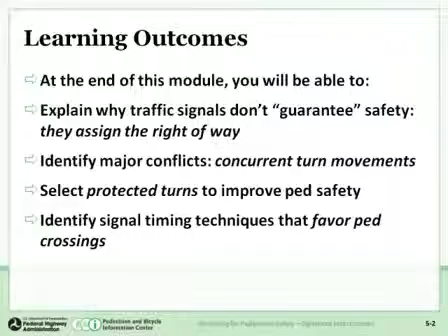We'll talk about the major conflicts for pedestrians, which are mainly concurrent turning movements with vehicles. We will talk about protected turns versus permissive turns and how protected turns improve pedestrian safety. And we'll go through a number of signal timing techniques and signal display techniques that can favor pedestrian crossings and sometimes measurably improve safety. Sometimes we think things improve safety, but research hasn't been done yet to bear that out for some of the treatments here.

So again, as I said in the introductory notes there, traffic signals assign the right-of-way. They don't necessarily guarantee safety. It's simply a tool to regulate the flow of traffic where there's too much traffic, whether it be pedestrian traffic or vehicle traffic, to manage at an intersection without signals. We often find that signalized intersections actually have more crashes than non-signalized intersections at times, and so we don't put them in specifically to improve safety.

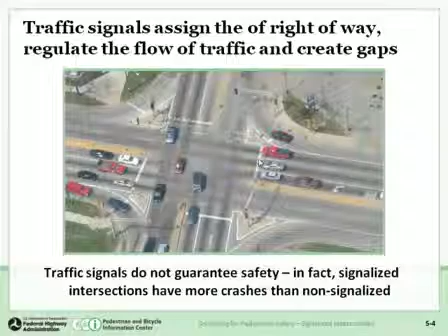Although, again, we can do things, we're going to talk about many things we can do to make them better for safety, at least for pedestrians.

So, again, we'll see this theme throughout the webinar here today, that the turning movements are the major issue for pedestrians. If you look at this image here, on the left side, you can see the right turning movements by vehicles conflict with pedestrians in the crosswalk there. And these are concurrent movements. Notice the green arrows illustrate all the movements that are legal during this particular phase of the intersection or the signal.

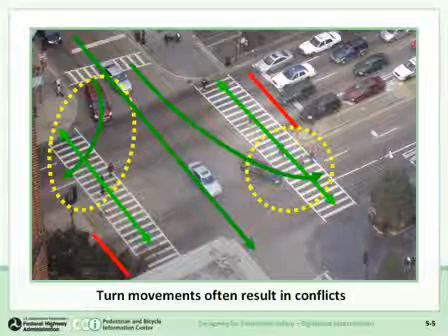And the right turn movement and the pedestrian movements in both directions conflict. Likewise, on the other side of the intersection, the left turn movements conflict with the pedestrians in both directions. So this is the major conflict for pedestrians of these turn movements, and we'll talk about that repeatedly throughout the webinar here.

Another reason why traffic signals don't ensure protection is that pedestrians ignore the light sometimes. The interesting thing about this is that people that do this do so, for the most part, quite safely. We've always said this in the Design for Pedestrian Safety course, but there's been a recent study in New York City that bore this out as well, that although it can be a source of danger, people, when they go across against the light, are even more vigilant and more careful than they might otherwise be because they know they don't have the right of way, even though technically it's illegal.

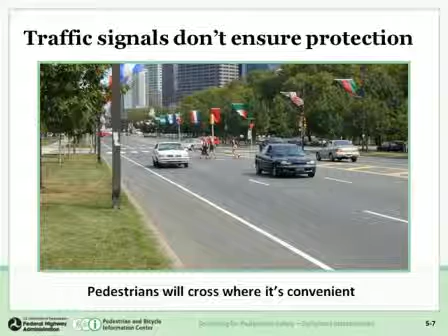People cross where it's most convenient. In this case, just a few hundred feet, if that, 50 or 60 feet from a signalized intersection. It may seem safe when they're crossing, since there's no through traffic, but they don't realize there's a car coming from a turning movement at a signalized intersection that could be more dangerous than they expected.

And then there's the driver errors and things that drivers do where traffic signals don't ensure protection. One is red light running, of course. It's a relatively small percentage of pedestrian crashes at signalized intersections, but they'd be very severe crashes because they typically occur at high speeds, whatever the prevailing speed of vehicles are along those streets, sometimes faster because red light runners often accelerate to get through the light.

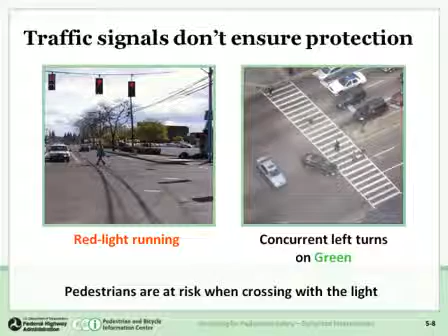And then on the right, you see the concurrent turns that we already talked about in the earlier slides, one of the major reasons pedestrians are at danger when crossing with the light.

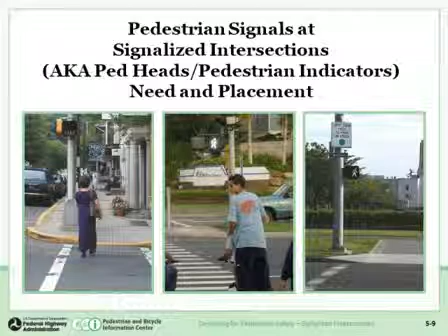So let's talk about pedestrian signals now and how we can provide them and where we should place them on our streets and at signalized intersections.

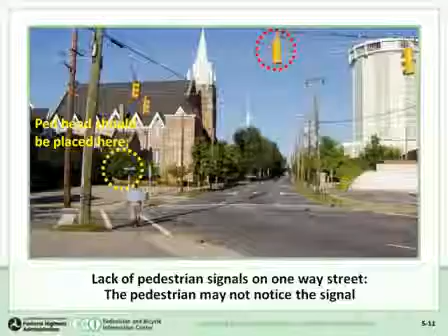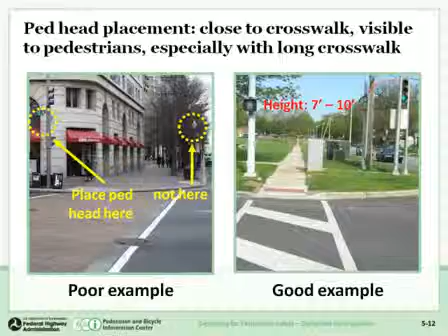Another challenge when thinking about signalized intersections is this two-step crossing. Those of you who saw the pedestrian crossings module might have seen an image where we talked about a two-stage crossing, used at a mid-block location or perhaps an intersection location. You may remember there was a big stagger between the two halves of the crosswalk for pedestrians.

If you don't have that stagger, and instead have two different parts of a crosswalk that are signalized separately, it can be very confusing. You can see here on the left there's a don't walk hand symbol, and on the right is the walking man symbolizing walk.

The pedestrians in the picture were walking with the light for the first half, and they just kept right on walking. They didn't realize the second half of the crossing had a different signal for it. So that can be really confusing—we need to make sure we don't place signals in a way that confuses people like this.

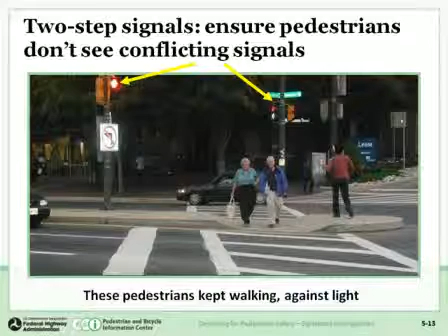So when it comes to the displays, the typical words 'walk,' then 'flashing don't walk,' then 'steady don't walk,' have been replaced, for the most part.

There are still some old signals out there if you look carefully, but for the most part we now have symbols, which is a good thing.

Generally speaking, the walking person symbol means walk, the flashing hand means don't start, and you can read this on the sign. The steady upraised hand means don't walk at all—you should not be in the crosswalk at all.

The problem with this system is that surveys in the past have shown that about half of Americans don't fully understand it. Is there a better way we can manage and display signals for pedestrians?

Part of the problem with the old system is that when the signal shows the flashing don't walk hand, pedestrians aren't sure if they can start. Technically, legally, you're not allowed to start during the flashing don't walk. Some pedestrians do, some don't—it can be fairly confusing for folks, and even drivers for that matter.

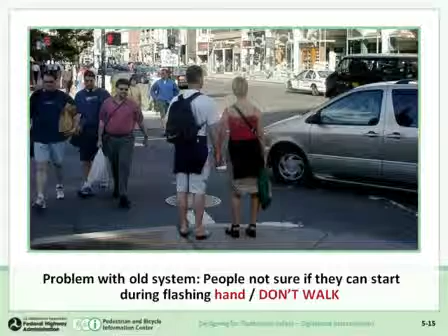So the new display, now a standard in the Manual on Uniform Traffic Control Devices, or MUTCD for short, is to have a countdown displayed with the flashing hand, so that when the flashing hand is going, there's a countdown showing how much time is left.

Before that signal goes to solid or steady hand for steady don't walk. People figure this out easily—you don't have to calculate it in your mind.

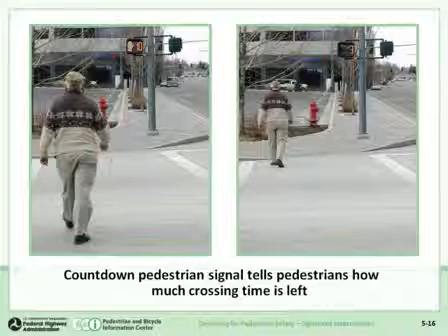I can walk 3 feet per second. How far is that? It's like about 100 feet. We don't do the math in our heads consciously - our brains just do it for us automatically and let us know how fast we can get across the street. We often cross at the same intersections over and over, so we get a feel for how long it takes to cross relative to how many seconds are left.

There's great research results on the pedestrian signal. I'm presenting today from San Francisco, where much of the research was done on this device, both from an operational point of view, and we'll also talk about safety research in the next slide or two.

Pedestrians understand how it works - it's just intuitive. The countdown's there, they see the number getting down towards zero, and that means people understand they should be out of the intersection by the time it gets to zero.

One concern when these were installed is that more people might start crossing during the clearance phase, which technically is illegal to do during the flashing don't walk - and that's true, we did find that in the research. But more importantly, we found that fewer people initiate their walk late in the clearance phase.

If they see only a few seconds left, they don't even start trying to cross, whereas those same people might have seen the flashing and, in a hurry, gone ahead and crossed anyway, getting caught in the middle of the street before the light changes to green for conflicting traffic. There are almost no pedestrians left in the crosswalk during the steady don't walk, because the count means people either don't start, or they rush and hurry across to get out of the street in time.

Another concern for us traffic engineers was that drivers would take a cue from the countdown and accelerate to beat the light. It turns out some drivers do pay attention to things like countdowns. I bicycle a lot, and I know colleagues in my office do too - I use the countdown as a bicyclist to help me speed up or slow down. I've seen drivers do it as well, but the bottom line is that safety-wise, it hasn't been shown to be a problem.

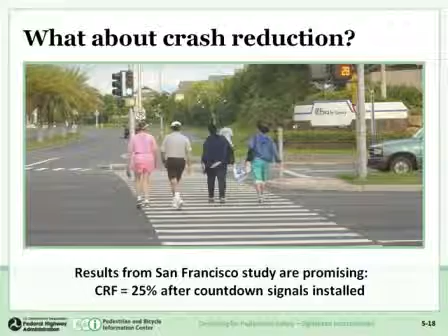So it turns out not to be a major problem with drivers using the countdown inappropriately. From a crash reduction perspective, research here in San Francisco showed about a 25% reduction in crashes after countdown signals were installed. The amazing thing is this research showed safety benefits not just for pedestrians, but also for motor vehicles - an actual reduction in motor vehicle crashes with countdown signal installation.

Because of these great research results, countdowns are brand new in the 2009 MUTCD - though it only came out in January, so it's not that old. It was adopted and became official in January, and in fact some states haven't even fully adopted it yet, though the deadline is soon. So it is fairly new, and countdowns are now required for new signals.

There is an exception if you have a very short flashing don't walk interval of 7 seconds or less - this would generally be for very narrow streets. The reason for the requirement is because of the great research results we saw: reducing pedestrian-vehicle crashes and all crashes, along with behavior changes that were, for the most part, positive with countdowns.

Let's talk about push-button placement and making sure those are convenient. One trend you'll see throughout this whole webinar module is that if we can make things more convenient for pedestrians, we'll get better behavior from pedestrians.

I hear traffic engineers that I talk to all the time - I am a traffic engineer myself - always complain that people, whether they're drivers, pedestrians, or bicyclists, aren't doing what we want them to do as traffic engineers. They aren't following the signals, they aren't doing this, aren't doing that.

But then we go do things that are very inconvenient. You're going to see a few things in this next little bit that are pretty inconvenient. And so a constant theme here that I'll be talking about: if we can make things more convenient in a number of different ways, then people will use the facilities you provide to them. And oftentimes that is safer to do.

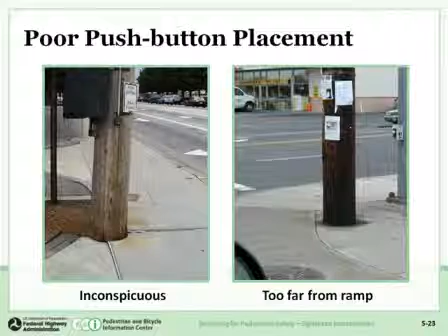Some of these are kind of fun - at the end here, we'll see interesting items. But the one on the left, you can see it's very inconspicuous - it's hard to find that button. They put up a sign, which makes it easier to find, but it's just not an easy place to find it. The one on the right is too far from the ramp and stuck behind that big power pole - not easy to get to, not easy to find for the pedestrian.

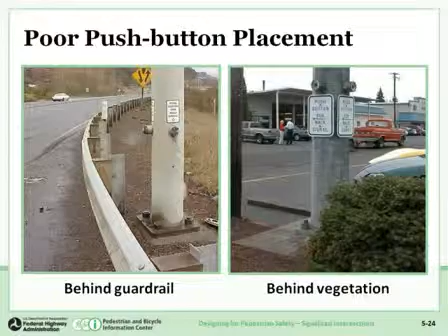It used to be a standard in some states; in other states, it was on the front of the pole. Oregon, actually, where I used to work, went back and forth, which is why you can see on that pole on the left there's several mounting locations - you can kind of see where the button had moved around a few times.

It just baffles me. But if you think about this a little bit and how this works, a lot of the challenge is that we have two different designers designing the roadway and then the signal stuff - it's not usually the same person. The signal designer puts a pole on the plans, the roadway designer puts the other stuff in there, and they've got to move things around during construction. That's where it really has to be dealt with, often by the installers and ultimately the responsibility of the inspector for the agency putting it in. So part of the problem is that there are so many people involved with this process.

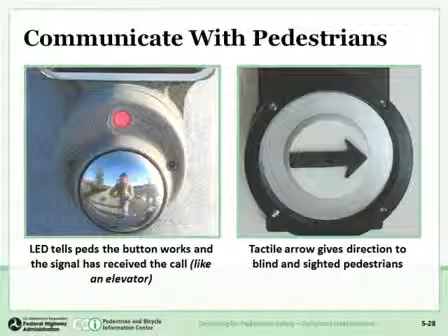On the right, you can see the tactile arrow. I'm not going to go into details on the accessible pedestrian signals, the audible signals for people who are blind or have low vision, but this is one feature that can help those pedestrians. There are a lot of other features that are going to be a requirement in the future but aren't currently required. It's a nice thing to do, to provide additional information. The arrow points to where the crosswalk is, and is required to be in line with the crosswalk if used.

Hi Michael, this is Davian. I'm sorry to interrupt. We're getting some audio complaints. Are you using a speakerphone that we can switch to? I can try to call along with a phone. Let me just try calling in. Okay. Are you there? Yes. Is that better? Yeah, we can hear you great now. Okay, I hope this will work. We're still working on trying to get the technical issues worked out here for the webinar. I want to apologize to everyone for that. If you want to go ahead and continue with your presentation, it seems like I can hear you a lot clearer now. Okay, all right, I just have to go back now. Sorry, I just hit the wrong button there. Okay, I think we were here.

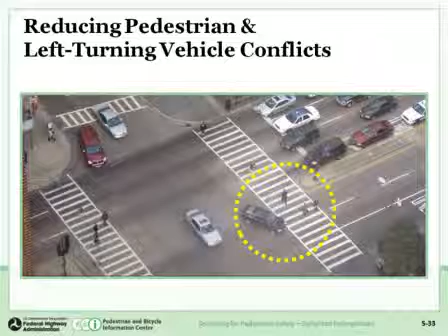So now let's talk about this issue of turning pedestrians and turning vehicles with pedestrians crossing the street, primarily the left turn conflicts.

We know that turning movements result in crashes at signalized intersections, and we find that left turning crashes with pedestrians are about 2 times as frequent as right turning crashes. We'll talk more about that today, and we'll also talk about some countermeasures for right turning crashes in a bit. But we find a crash reduction factor of about 70%, not just for pedestrian crashes but for all crashes, where we can use what we call protected left turns. I'm going to show you in a moment what I mean by that.

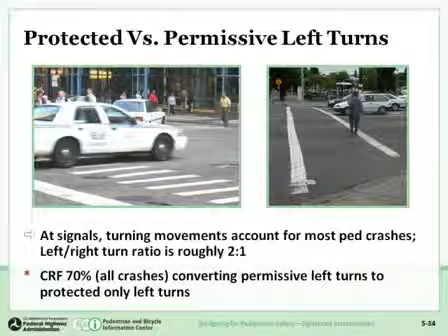So for permissive left turns, we had to modify the animation a little bit since there's no animation allowed in our webinar format—you wouldn't see it if I had it. So I've tried to make this work in a different way than we normally present it. We'll see how this comes out, and this is new for me as well as for you.

Often these drivers only look for—even in nature, we look for things that are large and can threaten us—so we look for a car or a large vehicle, as opposed to a pedestrian who's walking, particularly coming from the opposite direction, as I showed in that image.

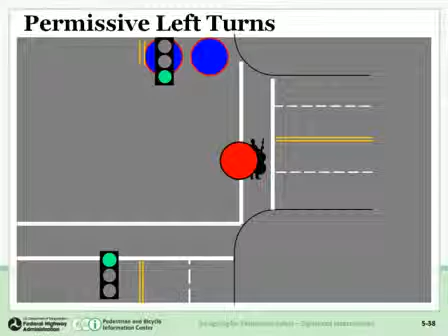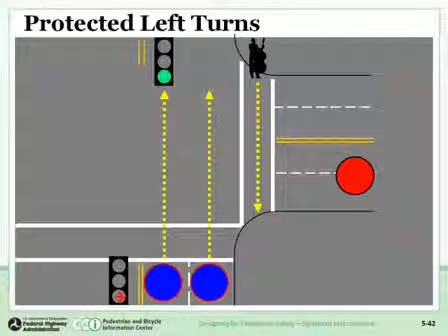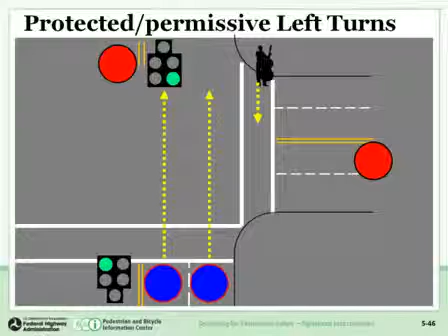And then the next phase is again back to that permissive phase where the blue cars are going north and pedestrians are heading south with the walk signal. But there's still additional cars that want to make that left turn, represented by that second red dot, and they again yield to oncoming traffic. Sometimes to get to the pedestrians you get that same possible crash at this location. Very popular from a capacity point of view, this protected permissive phasing, but it does reduce safety compared to protected-only phasing.

So the solution to this protected permissive left turn phasing: one thing that can be done is provide protected permissive phasing by default, operating similar to what we saw, but if a pedestrian pushes the button, then it reverts to protected only, so there's no permissive turns allowed when a pedestrian pushes the button if that left turn conflicts.

Sorry, just noting I had a little note coming to me. It says the audio is much better. That's good to hear. Okay.

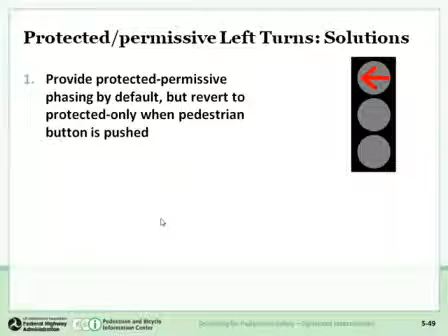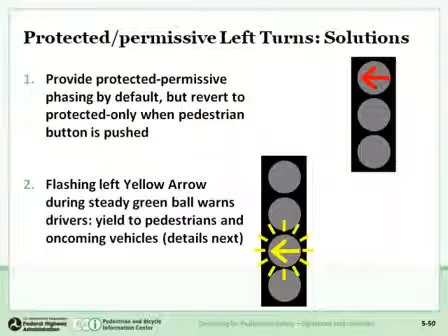There's another solution, called the flashing yellow arrow for the left turn movement. It's a little hard to show because we can't animate. This starburst around the signal means it's flashing - you won't see it flash, but that's what that starburst means. I'm going to show you some details on how this works. It reminds drivers to yield to pedestrians and oncoming vehicles, and you'll see how that works here.

We're going to go step by step through these phases. For the north and southbound movements only, we'll start with everything all red, both the arrow and the circular red. Then we bring up a left turn green arrow first. We're not going to show cars moving in this case, just going through the phasing.

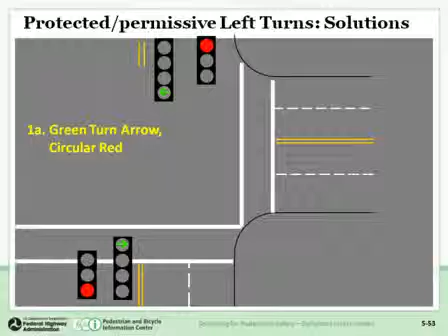Left turn arrow comes up, allowing turns in this case in both directions - it could be just one direction at a time depending on how the signal was timed and if cars were waiting to turn in both directions. Then it goes to a steady yellow turn arrow to terminate that green phase for the left turn, and back to red arrow and circular red, usually just for a moment, because it's all red, then very briefly it goes to the green ball.

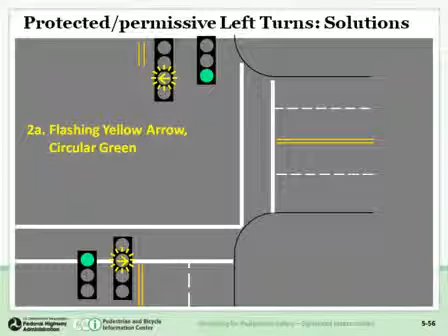The big difference now between this and the typical protected permissive phase is you now have this other signal head with a flashing yellow arrow. Imagine that's flashing yellow during this green ball interval, which generally means you're allowed to make that movement but must use caution. It has been shown to improve safety overall at signalized intersections that use protected permissive phasing.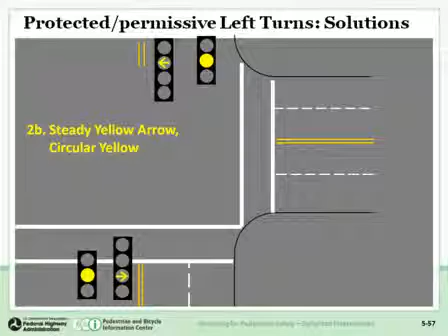Then at the end of that green interval, you see a short all-yellow for both movements, north and south - yellow arrow and round yellow signal, then back to red arrow and circular red. So that's how that works. It's a new treatment that has been shown to reduce crashes for all users. I haven't seen research showing a specific reduction for pedestrians, which is why we're not showing a crash reduction factor for this treatment.

So let's talk about other signal timing ideas to minimize pedestrian delay and conflict. A lot of these make things more convenient for pedestrians and therefore potentially safer. In general, use a shorter signal cycle length - the total time it takes the signal to cycle through all its phases. Typically they range from 60 seconds, and I've seen them up to 4 minutes.

240 seconds is ridiculously long. Think about that as a pedestrian - you'd have to wait 3 to 3.5 minutes to cross the street. People don't wait that long, and that's the problem with using too long a signal cycle. So try to use, from a pedestrian's point of view, the shortest signal cycle length possible, given other factors.

Obviously there's traffic and other issues that require other elements for signal phasing, and even the pedestrian clearance interval sometimes on a big street will require a longer signal cycle than you might want. You get two problems - one I already talked about: people may cross against the signal.

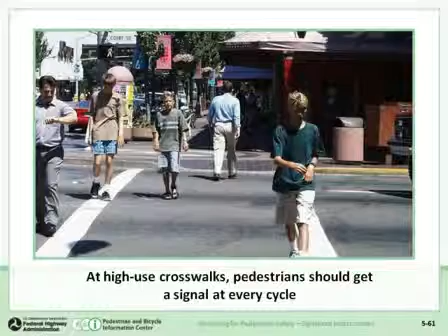We typically do this. Similarly, we can set pedestrian signals to recall to walk, meaning they default or automatically change to walk when the major street is set to recall to green. If you think about this street here, this is the major street north-south, the minor street east-west. As traffic engineers, we generally design intersections so the major movement is favored—it always has a green signal unless someone comes from the side street or wants to cross the major street and pushes the button.

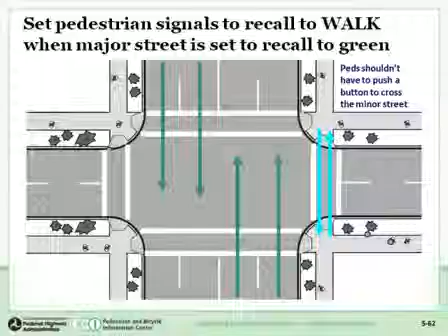That always defaults to green—in technical terms, we call it recall to green. Let's do the same thing for the pedestrian signal that runs parallel to that. If the vehicle signal recalls to green, we can also have the walk signal recall to walk. That's not always done—it's an option in the MUTCD—but it's something we can do to make things safer for pedestrians, more convenient and therefore more safe, I'd say.

Now let's talk about another treatment called the lead pedestrian interval. It gives people a head start to cross the street. It looks like a normal signal to drivers—nothing really changes unless they're very observant, so they don't notice the difference. But it gives pedestrians a head start.

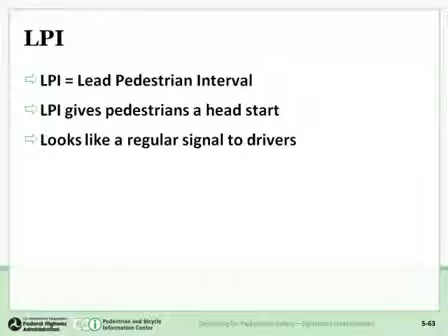So guess who was jaywalking across the street all the time? It was all those Oregon DOT engineers going back and forth to the cafeteria across the street. So the city of Salem was kind enough to open the crosswalk, which was previously closed, and allow us engineers to cross the street more readily.

But to do it, they put in this LPI, the lead pedestrian interval, and this is how it works. From a driver's perspective, it doesn't look unusual at all. But from the pedestrian's perspective—and a driver might notice this if they're really observant—the walk signal comes on first, about 3 seconds prior to the green interval for drivers, giving the pedestrian a head start out into the intersection.

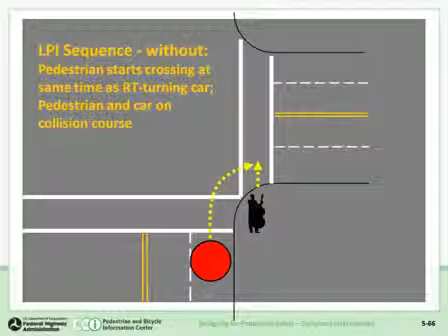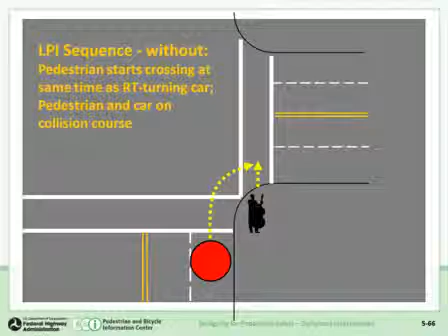So let's look at how this improves things for pedestrians. It's mostly for right turns, but it's also beneficial for left turns. A driver wants to make a right at the same time a pedestrian wants to cross. If they both get their green and walk signal at the same time, they'll start moving simultaneously, creating potential for a crash, or the driver cuts off the pedestrian, as we see in many situations.

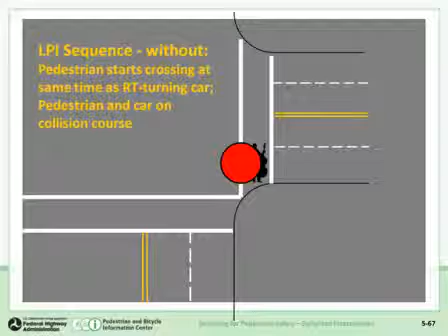That's without the LPI. If we do have the LPI, the pedestrian gets the head start—they start crossing earlier. By the time the driver gets their green, the pedestrian is already far enough out that the driver sees they need to yield, so they yield and make their turn behind the pedestrian and continue down the street.

Because we often have a major street and a minor street, and not that many cars are coming across the minor street, but since it's a very long crosswalk, we might need, say, 30 seconds for a pedestrian to cross.

That 30 seconds is a long time and will clear a lot of traffic out of each of those side streets in each direction. It's also important to think about the fact that when you have a major street and a minor street, a lot of those cars in the side streets probably want to turn. In those situations, it's really important to have the LPI, that lead pedestrian interval, to give pedestrians a head start. So we're going to animate this slide by slide here.

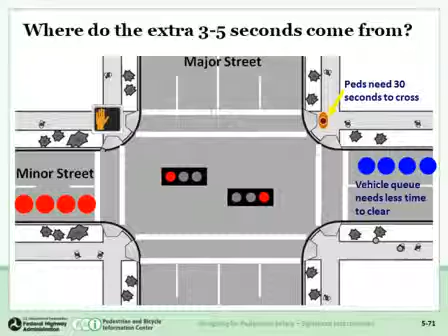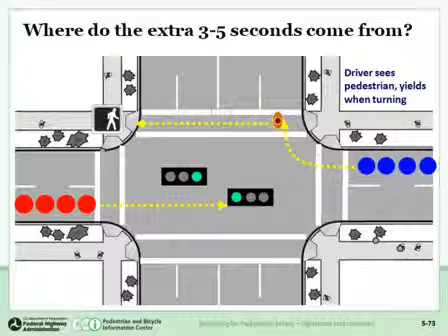First, the pedestrian gets their walk signal, starts crossing the street, gets partway out of the intersection, and then the green signals come on for drivers. You can see the first driver is going to make that right turn here, and other drivers going through. You can see all the drivers starting their movements. The first driver has now turned behind the pedestrian and is continuing on. The other drivers are going through in this case.

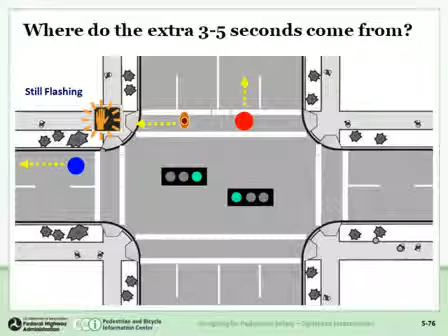The pedestrian is still crossing, right? It's still flashing now—it started flashing when he was about a third of the way across. The driver making that left turn sees the pedestrian because he's well out in the intersection now, and yields while turning. Notice it's still flashing, the pedestrian's still crossing the street, and all the cars have now cleared the intersection.

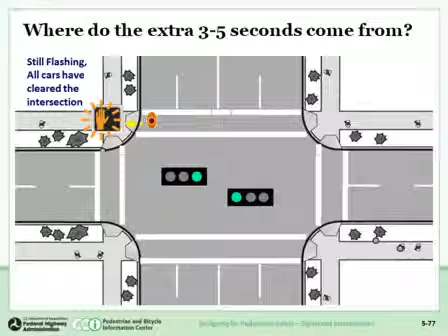And then finally, there are no cars at all anywhere around, except perhaps the ones waiting to go through on the major street. So even though we gave the pedestrian a head start because there weren't that many cars making those turns, there was sort of dead time at the end anyway. So the idea here is to take some of that dead time for motor vehicles and use it at the beginning to give pedestrians a head start.

Here's an interesting scenario. A colleague of mine was at this small town in California several years ago and actually watched these women here with their baby strollers. You might just be able to see a little kid's face standing there next to the stroller.

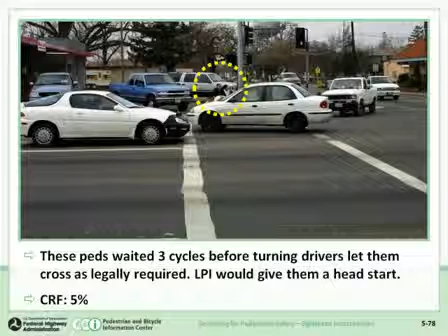They waited three signal cycles to cross the street because drivers, like the driver in the white car making the left and the driver in the white pickup making the right, would not yield to the pedestrians while they were trying to cross. Three signal cycles. This has been shown to have a relatively small but important crash reduction factor of about 5% by installing the lead pedestrian interval. If we provided that here, these pedestrians could have hopefully crossed the street more readily.

Now let's talk about restricting right turns on red. Generally speaking, in this country, right turns on red are allowed. That's not the case in most other Western countries. So right turns are allowed here, but they're not in many states, they're not in many countries, and they're not in New York City. New York City is the only place with a blanket ban on right turns on red in the U.S.

So it's something you might want to consider to improve pedestrian safety. It's not something typically done citywide, like I mentioned, but there may be times where it's really important to do so. Some of the reasons why you might want to do that are situations where there's poor sight distance between vehicles and pedestrians.

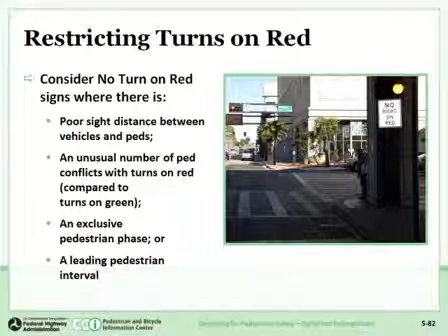Two other reasons you might want to consider no turns on red would be the exclusive pedestrian phase, which we're going to talk about in just a little bit, or the lead pedestrian interval that we talked about a few moments ago, that head start for pedestrians. It's important to not allow vehicles to turn during those phases.

So we can restrict turns on red in several ways. One is to do it at all times. This is an example of that, where it's just a normal sign - no turn on red - just like the last picture. You can't turn on red any time.

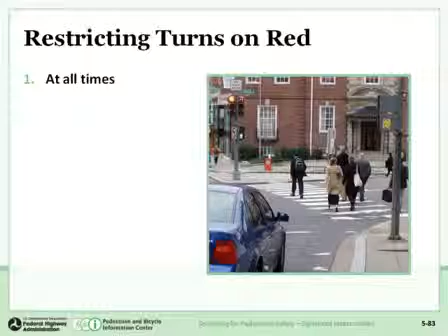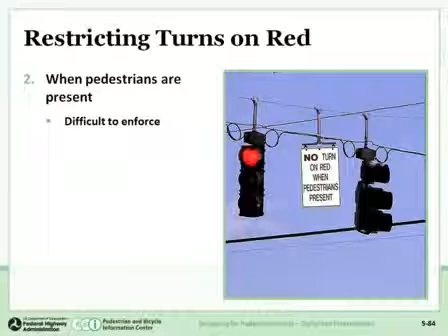This is also allowed: you could put no turn on red when pedestrians are present. The problem with this is it's pretty difficult to enforce, and it's even hard for the driver to understand. Does it mean anywhere in the intersection? Does it mean in the crosswalk right in front of me? Is the crosswalk to my right, my left? Which crosswalk am I looking at to determine whether there's pedestrians? And what about the pedestrians that are 100 feet down the street, do they count? It's pretty hard to know, so I don't recommend this as a good solution, but I've seen it done in a few places. It certainly is an option.

You could also have this work in a way that when a pedestrian pushes the button, if it's an area that has push buttons, you could bring up the no turn on red sign when a pedestrian pushes the button for the crosswalk that right turn on red would be conflicting with.

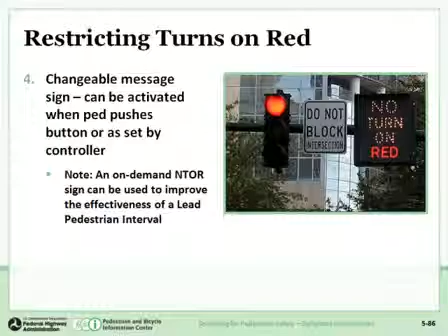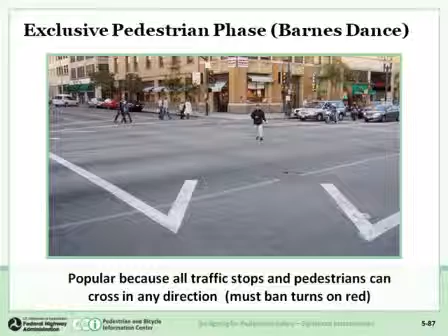But everyone, including pedestrians, pay the price in delay. If you look here, we see the pedestrian standing on the corner waiting for traffic in one direction. You can see traffic coming from the right here, going through and making left turns. Then they wait for traffic in the other direction. This vehicle in the white truck's green signal is on now, and he's about to go through the intersection. They wait for that traffic as well. And then finally, the reward is the pedestrians can cross in any direction.

So it is definitely a safety benefit to use the exclusive pedestrian phase. You see a crash reduction factor of about 34% when these have been used. But it does decrease the efficiency of the intersection, not only for drivers, but for pedestrians as well. Typically, we only recommend this being used where there are very high pedestrian volumes and many turning vehicles conflicting with those pedestrians.

Otherwise, we don't use that often because of the significant delay to pedestrians and motorists. And again, when we delay pedestrians too much, we often see not so good behavior, people crossing against the lights. They don't want to wait for all that traffic to move in all those directions before they can cross.

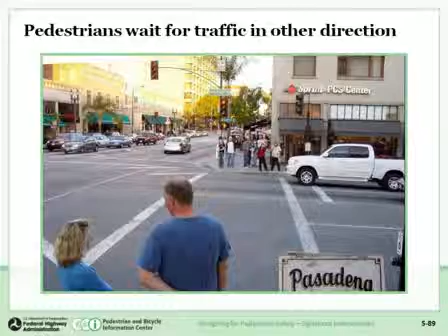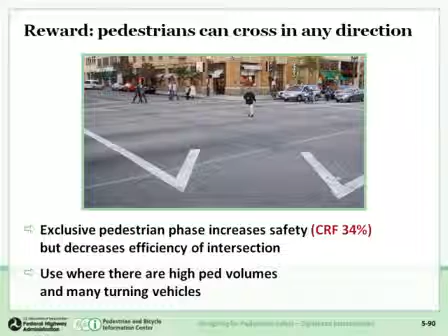And again, it's important to have no turn on red signs. In fact, I think if I go back a slide, I guess there isn't one here, but it would be important, in my opinion, to have no turn on red signs posted at these intersections to keep drivers from turning across the crosswalks when the walk signals are on.

Okay, one last item here, and then we'll turn it over to Q&A. We're going to talk about using ITS, or Intelligent Transportation Systems, to help pedestrians out a little bit.

Kind of a neat solution that was done in Portland, Oregon. This intersection here happens to be an unsignalized intersection. They simply added a pedestrian crossing to it. Technically, that's not allowed per the MUTCD. Portland and Seattle are doing this anyway. So let's just assume that this is mid-block, we can use it somewhere else. But it doesn't really matter - where it is doesn't matter as much as how it works.

So the idea here is to help pedestrians who are slower get across the street. This signal existed for pedestrians to cross. It's a pedestrian signal, so pedestrians push the button and would get, when this was installed, the requirement was 4 feet per second for the walking speed. And then we get a walk signal plus however much time to cross the street that it took to cross at 4 feet per second.

But there was a request by people in the area that said, we walk a little slower, we need more time to cross the street. So the city said, well, we could do that, but if we brought a slower walking speed of 3 or 3.5 feet per second, it would mean that we'd have more delay in motor vehicles every time someone pushed the button. Let's try something else.

And they put in these microwave sensors. You can see them up here with the circles around them, pointing down towards the street and aiming at the crosswalk, tracking pedestrians as they cross the street. They're microwave-based sensors to help pedestrians cross.

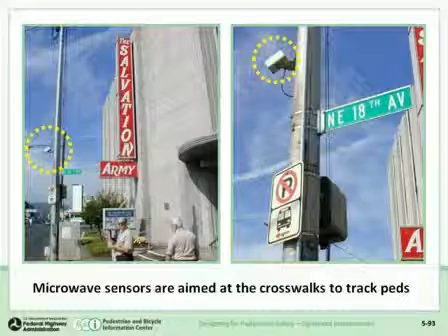So the signal timing wasn't changed in general. The pedestrian clearance time was timed at that normal 4 feet per second for the flashing don't walk. But the microwave sensor tracks the people as they cross and then adds 4 seconds of crossing time if pedestrians haven't finished crossing by the time that the flashing don't walk would normally get to 0. It'll do it up to twice, it won't add any more than 8 total seconds to the crossing.

So the city wanted to see what the effect was and how often that was used. And what they found when they studied this is that the walk phase was prolonged in only about 20% of the crossings. So if they had just changed the timing to a slower walking speed all the time, they would have delayed traffic all the time by a certain amount, whereas in this case, the 80% of the crossings didn't require any extra time in reality, so they didn't have to delay the traffic by all that time.

Earlier I talked about the change in the requirement of walking speed to 3.5 and then 3 feet per second as a check. The new MUTCD does allow for what's discussed in this last set of slides: if you have some way to detect pedestrians and prolong the walking time, you don't have to reduce the walking speed to 3.5 feet per second. You can leave it at 4 and extend the time as needed for slower pedestrians, as done in this example.

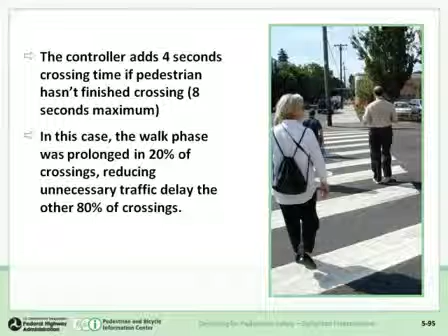Another thing people often ask me is what happens with the countdown signal when you do this. Does it go down to 0 and then back up to 4? The answer is that it just continues to flash. It goes to 0 and then blanks out. The countdown generally blanks out and the signal keeps flashing to help pedestrians get across the street. That's my understanding of how this will work, although I've never seen one installed with the countdown. That's what the technicians tell me would happen if the signal was built that way.

That's actually all of the PowerPoint that I have, and we definitely have some time here for Q&A. If there are any questions, there's a different webinar that occurred on Signalized Intersections several years ago that has even more detail on accommodating pedestrian signalized intersections. And of course, this webinar will also be archived, so you'll have both this webinar and the other webinar, with the web address shown above, as another resource for pedestrian signals.

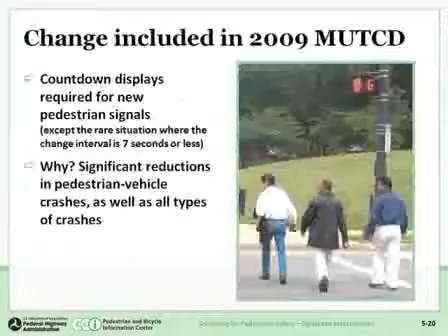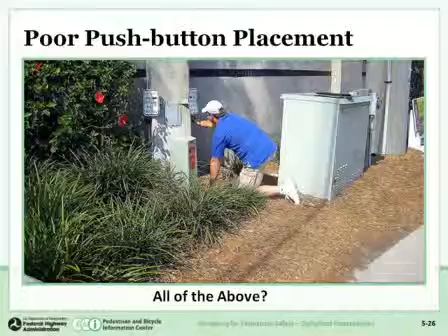We've been doing a colossally bad job. I'll go back a slide—I'll go forward a few slides to show you just how bad. If you can see my slides, this is the really poor result of what we got when people were being cheap, and we shouldn't be cheap anymore. It's a requirement—they need to spend more money and budget more for signals because these requirements, as shown in this slide and this slide, are now in the manual, and there's really no way around it.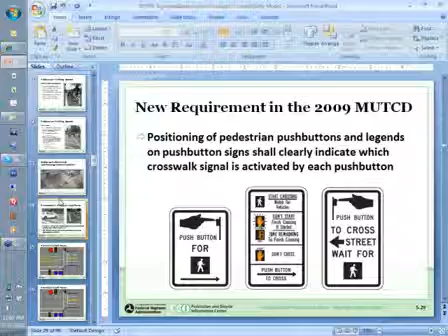It's an option, there's actually a slide. We don't go into it in this module. It could take me a while, but I can probably pull this up pretty quickly. Actually, let me try. As I'm pulling it up, I'll try to describe it.

The MUTCD allows for several different scenarios with how the pedestrian clearance interval fits in with the yellow and the red. They can overlap. Theoretically, you could have the actual calculated clearance interval...

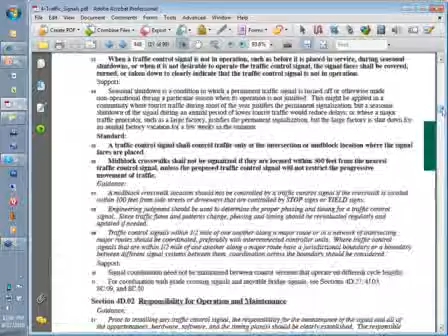Just trying to pull up a page from the MUTCD here real quick. Okay, so if I can find the slide here, it's actually - you can show it, see if you can find it. Probably should have yours. Gotten really big. Yeah, pedestrian signal, everything else.

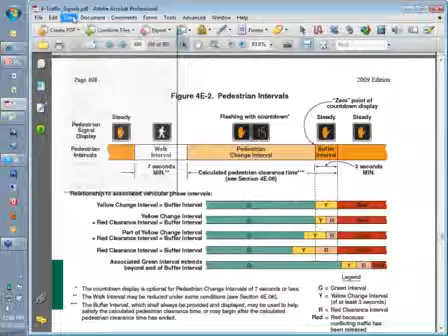Here we go, can you all see that pretty well, hopefully? Let me know if you can see it or not. Yeah, we're able to see that. Okay, full screen, a little bit bigger. Maybe not - there you go.

It didn't work, okay. So this is an image that shows the options for where the flashing don't walk with the countdown can occur, and how the intervals are calculated within that. What's pretty typical as far as how the display works is that we see the pedestrian change interval, or the flashing itself, end as the yellow starts and then the red - that's pretty typical.

It is allowed for the actual time then to be calculated to the yellow, but not through the red. If I'm looking at this correctly, I'm pretty sure that's what I understood before - the actual calculated time can include the yellow interval.

Typically, though, in my experience, even when that's the case, it doesn't display as such. The flashing don't walk wouldn't - even though you might calculate 18 seconds for the clearance interval, and there's 3 seconds of yellow, then the actual flashing don't walk or flashing hand time would be 15 seconds, even though technically the actual clearance time goes through the yellow, and that's the time pedestrians can get out of the crosswalk. So there's several different ways it can be done, as you can see in this image from the manual.

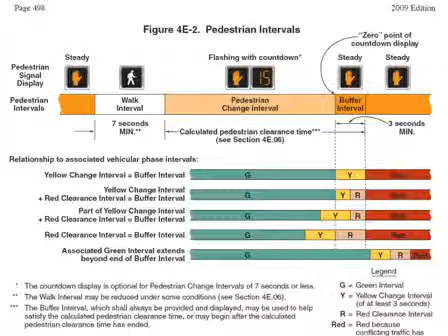On slide 5-60, stacking pedestrians waiting are in the bike lane. Any design warning signage available?

Let me go back to that, slide 60. So I don't know of any specific warning signs, and I guess to warn—

I'm not sure if they want us to warn pedestrians not to step out into the street, or warn bikers that pedestrians might be in the bike lane.

Just as an anecdote, just yesterday I was biking through Sausalito on a ride, and literally a kid stepped right in front of me into the bike lane. He was looking the other direction at traffic and never even looked at me. He was stepping into the bike lane, assuming it would be safe to step there, and he was going to look for traffic after he stepped into the bike lane. He just didn't think about the fact that there were bikes going by in that space.

And so that's what happens. People just, as I mentioned earlier, human nature is that we look for things that are more damaging to us. It's not conscious.

Subconsciously, we just think about what can really hurt us, and we don't think that the little white space with the bike lane could be a large vehicle that could hurt us. And of course, bike-pedestrian crashes do happen. Pedestrians do get hurt from them, but obviously not as bad as car-pedestrian crashes.

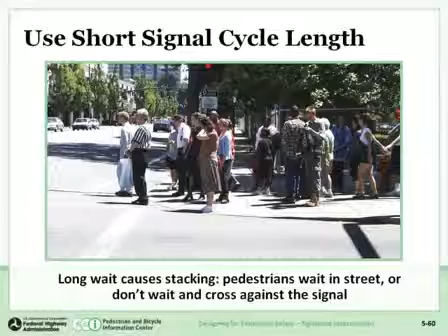Good question, I should have covered that during the PowerPoint. I'll go ahead and pull up the slide that talks about crossing speeds. Generally speaking, it says here that the 4 feet per second is measured from curb to curb. Obviously there's a bit of engineering judgment involved, because typically there's a corner radius at the corner.

So if you measure the length of the crosswalk from curb to curb on one side, it might be 10 feet shorter than the other side, the side closer to the intersection or cross street. I typically measure from the middle of the crosswalk, curb to curb, in the middle. That's how I do it when measuring this.

I use the middle of the crosswalk and the middle of the ramp that needs to be in the crosswalk. Generally speaking, I also like to make sure the middle of the ramp is in the middle of the crosswalk. So if I'm designing an intersection, that's the same point: middle of the ramp, middle of the crosswalk, then measure the other point on the other side. There are times you just can't fit the ramp right in the middle of the crosswalk you want, so it's an engineering judgment call. But generally it is curb to curb, picking a typical, logical location for which point within the width of the crosswalk that would be.

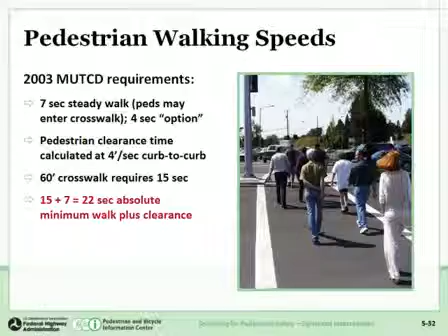For that second requirement, I'll go to this next slide that looks at the slower walking speed of 3 feet per second, which includes both the walk plus the clearance. Not just the clearance time, but the walk plus clearance has to be enough time for a person walking at 3 feet per second to get from the push button to the curb on the other side.

You measure curb to curb, plus the distance to the push button. You want to measure both push buttons on both sides, and you choose the longer one, whichever is furthest. In theory, since it's new, it shouldn't be more than 6 feet, but there are plenty of existing intersections where the push button isn't within that 6-foot requirement, so you'd have to use more—10 feet, 15 feet, whatever it is. So it's curb to curb or curb to push button. Actually, it's both—you don't get to choose. It's curb to curb for the 3.5 feet per second.

Stay on this slide—I shouldn't have shown you the previous one. It's 3.5 feet per second from curb to curb, or 3 feet per second from curb to push button, and you have to do both tests actually. You have to check both to make sure your walking speed is accurate, or that your signal timing—walk plus flashing don't walk—is correct.

Okay, all right, we have time for a few more questions. The next question asks: has any of the research addressed the fact that many right-turning vehicles actually turn right before the light turns green?

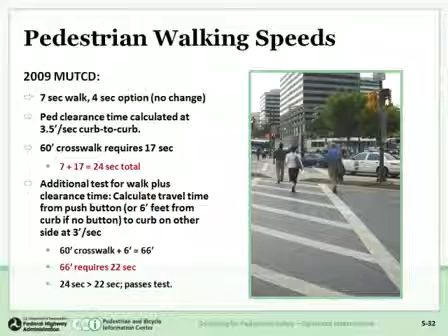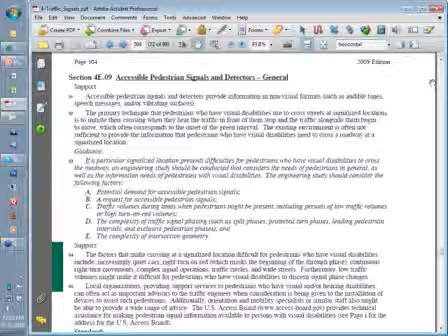All right, sure. The next question is: is the LPI effective in reducing conflicts between left-turning vehicles and pedestrians who were originally heading the same direction?

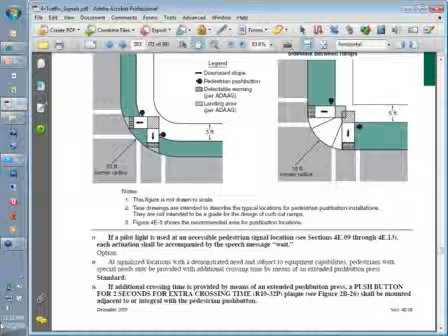It's a hard question, I don't know. You'd have to look at the research on LPIs to see if there was an actual safety benefit. It's a tougher question because the left turn issue in the example I showed from Salem was a left turn, but an unusual one. In a typical left turn on a two-way street, there's a lot more going on, as we talked about—there's oncoming traffic that drivers are looking for and yielding to, and they're also supposed to yield to pedestrians.

The thing is, a lot of times those crashes on permissive left turns occur when the pedestrian was well into the intersection—they had a few seconds to start crossing while oncoming traffic was going through, but the driver still didn't see them because of that problem. I would suspect that having an LPI would give the pedestrian a little more time to get out there and further establish their presence in the crosswalk.

So in theory, I would think it would improve the safety. I don't know the research that's shown that, and it might be pretty minimal because, again, just where the pedestrian is at when the driver actually starts taking that turn depends on so many factors, like the length of the crosswalk, the number of cars oncoming that the driver is using, and all those factors.

So in theory, it would give the pedestrian 3 seconds or so more time to be further out there, so probably would be better. In fact, there are times it might mean the pedestrian would be clear of the crosswalk entirely if he had an LPI, because by the time he crossed with his LPI and the oncoming traffic went through and the driver made the left, he's already cleared. But there are other times where he wouldn't be cleared, so it's hard to know for sure. I would think it would theoretically have a little safety benefit, but I think it'd be hard to show it in the research if there'd be much benefit. But in theory, yes.

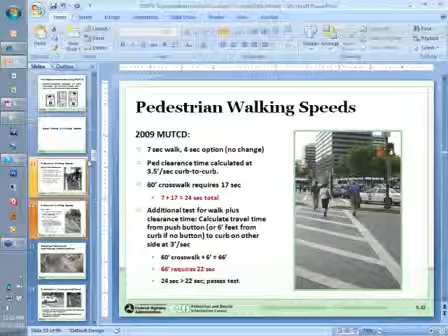Can you discuss half signals and whether they are prohibited or just not recommended by the MUTCD? They're prohibited by the MUTCD. We have one in the PowerPoint only because it happens to illustrate something we don't have any other examples of. But this is a half signal. In other words, it's an intersection that is otherwise — and you can just see on the right side a stop sign.

For the purpose of the course, you should probably change it so you can't tell that it's an intersection. We could do that pretty easily by changing the way this picture looks. But essentially, this is an intersection that is signalized for through traffic on the major street to be stopped so pedestrians can cross. But there's no specific signal for the cross street, the side street here.

Technically, the MUTCD states that if you signalize the intersection, all approaches need to be signalized or something like that. I forget the exact language, but it's a 'shall' — all approaches shall be signalized or something like that. Because of that language, a half signal, or this kind of signal that signalizes half the streets but not the other half, is not allowed per that standard statement. They're certainly being used in a number of jurisdictions, and I keep finding increasing ones.

Interestingly enough, there is sort of a way around it. I've seen situations where, instead of a complete half signal, the signal is just left in flash most of the time until a pedestrian pushes the button. In Tampa, I've seen a signal like that where it's signalized for all approaches, but it's all flashing, and drivers from the side street just see a red flash, which means the same thing as a stop sign. In Tampa, the one I've seen only operates red, yellow, green during school times — there's a school crossing right out there.

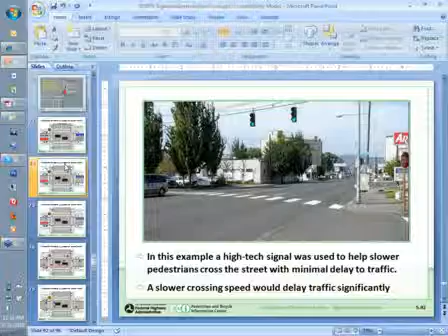That was why that crosswalk was previously closed, and I guess I can show that real quick. This one right here, there it is. Crosswalk on the left was previously closed because of the double left, and they opened it. They wanted to have a better pedestrian network and make it easier for us engineers at Oregon DOT. It's odd to have that, but it works fine in that case.

So that's why they use the LPI in this example. I wouldn't recommend doing it except in extreme circumstances where there really is no other option. I can't think of any reason why I would ever allow a pedestrian crossing with a double left at a normal intersection that has traffic traveling in both directions. You just need to have an arrow for that.

The issue here is that your choices for signalizing this intersection for pedestrians, the only way to make it work for pedestrians without the LPI, would be to have an exclusive pedestrian phase, essentially, because you only have two vehicle phases: the through on the traffic that's making the double left, the through on the cross street, and then the double left. There's two vehicle phases, and that's it. The only other option would be to provide an exclusive pedestrian phase for pedestrians to cross that street. In this case, I chose not to do it that way, but to provide an LPI instead.

Which, in a sense, is a short exclusive pedestrian phase for 3 to 5 seconds, right? And then vehicles can start turning.

Our last question asks, are there examples of signals timed in conjunction with public transit to provide a walk signal to pedestrians crossing the street to board public transit? I don't know, I'm not exactly sure what the question means.